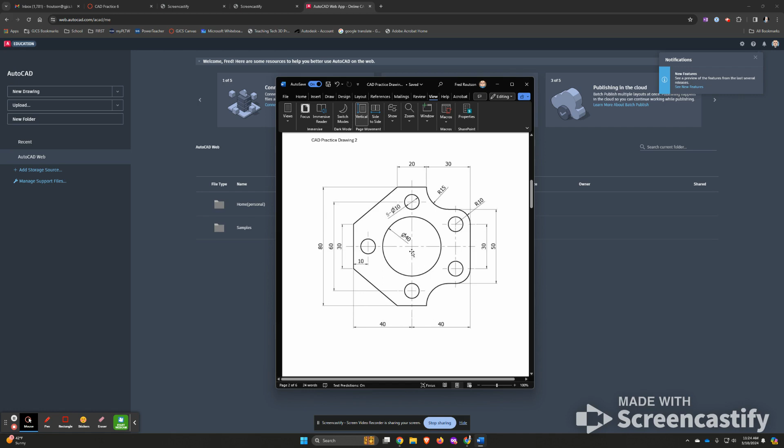So we flip back over to my AutoCAD window, and I'm going to do a new drawing. I've started to do something now that I recommend, to work in layers. I like to have a couple of different layers. By default you have this 0 layer, that's your base bottom layer. So I'm going to create a layer, and I'll call that construction.

And I'm going to change the color of the stuff there. It doesn't matter, just something different than white, so I might make that construction green. Then I'm going to hit layers, the plus sign, create a layer again, and I'm going to create what's called an object layer, and I'll leave that white.

And then I'm going to come over here to the top of this, underneath the ribbon, and choose my layer. I'm going to work in the object layer.

Another button that's really going to be helpful to you is this up here that's called Zoom Extents. I click that, and what I really want is to see this x equals 0 green line, this vertical line, which represents your x equals 0. And then down here, barely visible at the bottom, is a red line, which is your y equals 0. So I'll start this drawing, let's go back and look at it.

I'm going to start with the circle right in the middle at 40-40. So I'm going to come up here and click the circle button. I want to point out, down at the bottom of the screen it says circle, specify center point for circle, or 3-point, 2-point, or tangent radius. These are different ways to draw circles, but we're going to do a center point, so I'm just going to type in my XY coordinates: 40, 40, because that's the center of my thing.

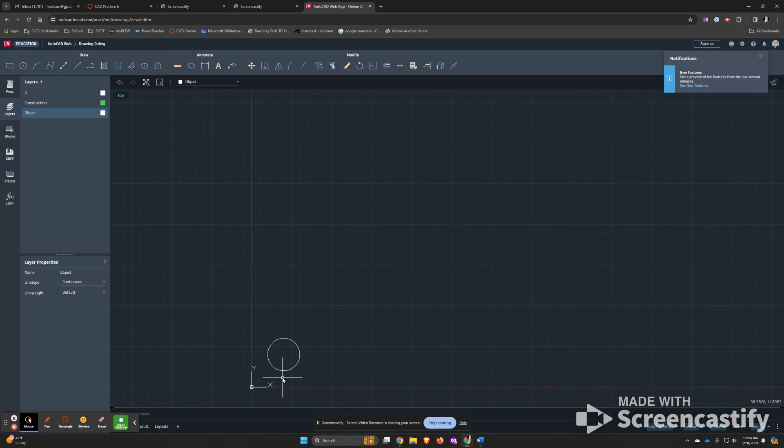Now it's asking me to specify the radius of the circle. I'm going to go back and look—that circle with a line through it means diameter, so the diameter of that circle is 40. Geometry tells us the radius is half of that, so it should be 20. Or I can click down here on this command line, click diameter, and now it says specify the diameter of the circle, and I can just type in 40. So when you get into really big numbers, odd numbers, or fractions, being able to put the diameter in exactly is very helpful.

So I've got my circle. Now I'm going to start going around the edge of this thing. I'm going to draw a line on the x equals 0. I'll start here, and that little line is 30 units long, which means—and this is broken right in half.

So I'm going to assume that midline is 40 units across, or 40 units up. So that's going to be 0,50 for this top point, and then 0,30 for the bottom point. So I will flip back over to my drawing.

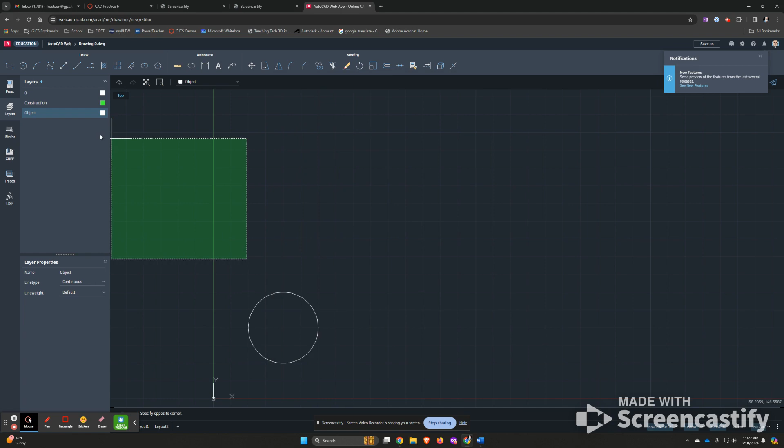I'm going to go to my line tool. There's your line tool. And here it says specify your first point. So x equals 0, y equals 50. I hit enter. It says now specify your second point. So I can go 0, 30, enter, and that's drawn.

Now I can just keep going around. So I need to go from that point down to this point over here, which is... I just made a mistake. I made a big mistake. Not a huge mistake, but I made a mistake. So I'm going to go back and fix that mistake.

So this is 30 units wide, which means it's 15 above and 15 below. So that should be 55, and that should be 25. So I'm going to hit undo. This is your undo button. And I'm going to go to draw.

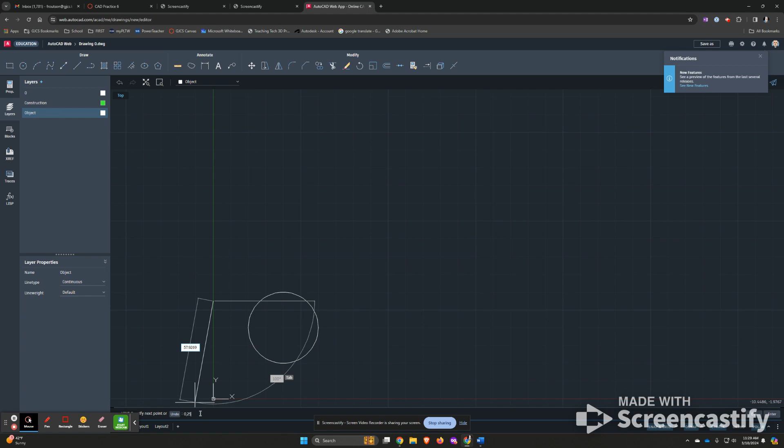This is the thing, I mean, we all make mistakes, and I make mistakes more than most. So my first point now is going to be 0, 55. And then second point is 0, 25, because it's 15 above 40 and 15 below 40.

Now, this is going to be, because this line down here is only 20, that's going to be 30, 0, and then 50, 0. So my next point is going to be 30, 0. And then the next point after that is going to be 50, 0.

Okay. Let's see, okay, that's looking kind of like the same.

Now this next one is a little bit more of a challenge. So I have to look at this drawing and I see that this little thing back here is 50 units wide, which means it's 25 below 40 and 25 above 40. So 40 minus 25 is 15. So this line right here is going to be 15 above.

And I'm going to go straight up because right now I'm going to draw this as a squared off corner, and then we will come and put the fillet in later. So that's the trick to this. That's the whole point of this assignment, is learning how to do these fillets.

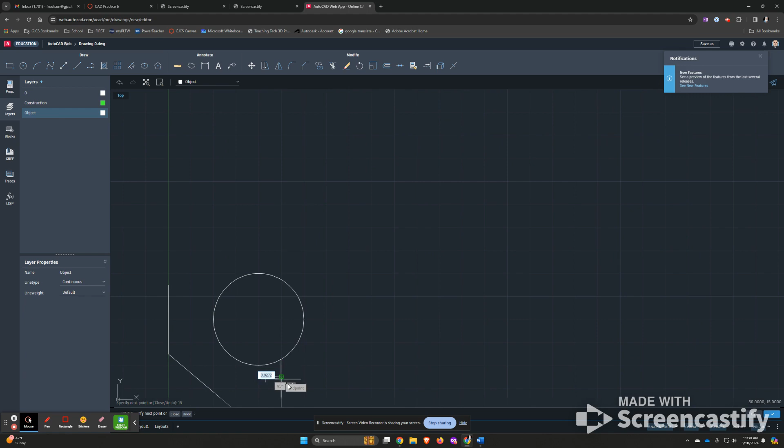So I'm going to go, and I could just do this. I could just move my cursor up here so that I'm drawing a straight line, and I could type in 15 into that and hit enter. And I can come over here and I'm going to draw this, and this has got to be, let's see, from that point over the edge is 30. It actually is labeled right up here. It's labeled 30, so that's going to be 30 long.

So I'm going to get my line so it's horizontal. I'm going to type in 30, enter. And then this one's going to go up, and remember this one goes up 50, enter. And I'm going to come...

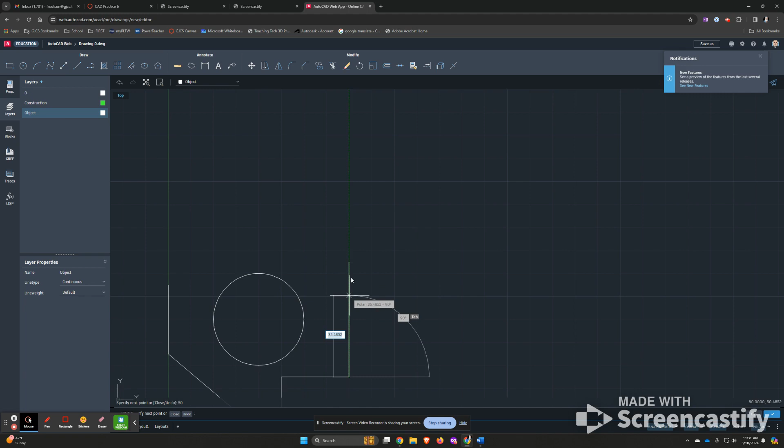50. Escape. All right, I'm going to undo. Okay, because I don't know what that was. So I hit undo down in this command line. I'm going to get this thing going back.

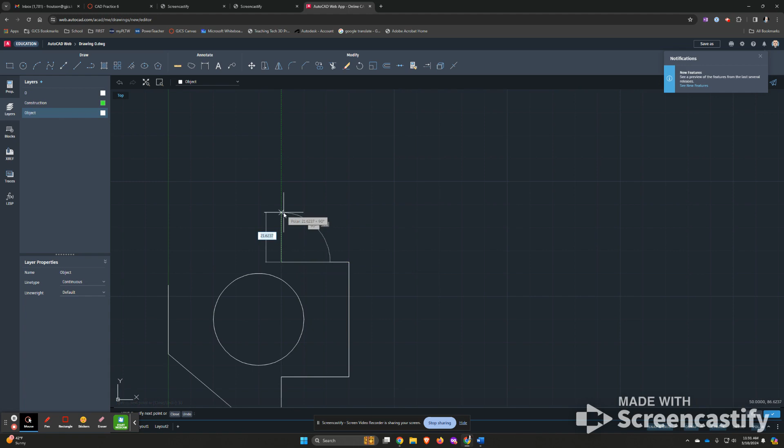I'm going to go back 30 again. So 30, enter. I'm going to go up 15. I'm going to go over 20. And then I'm going to just kind of go back to finishing that thing. And then I'm going to hit escape twice. No, we'll click there. And then I'm going to hit enter to get out of my line tool.

So that's roughly the outside. Now, this is the whole trick of the assignment.

It's coming up here to this modify part of the ribbon where it says fillet. I'm going to click on the fillet. I'm going to look down here in my command line. It says select first object or radius. I want to click on radius because I want to set my radius.

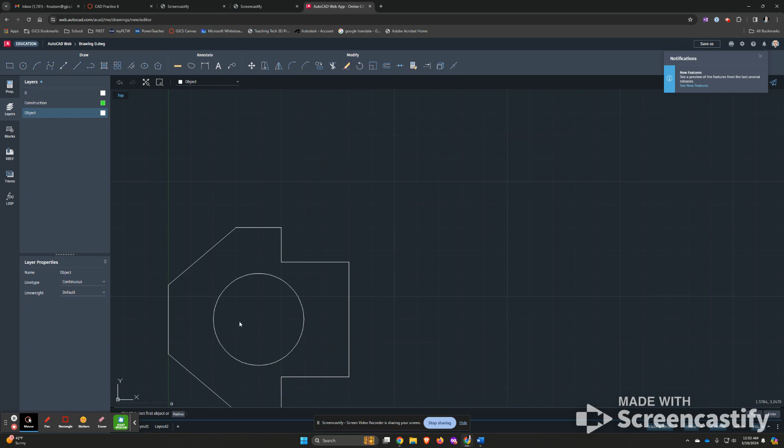And going back to here, I want to do these inside corners, which are R15. So I'm going to type in 15 down here, hit enter. So now it says my fillet radius is 15. Now I can select the first object and then the second object. And that puts that in there.

So now I'm going to do fillet again. And the cool thing about AutoCAD is that it will remember what you did. Excuse my dog barking in the background here.

So it remembers the last radius was 15, and it does that again. Now I'm going to do the fillets for these. I need to change the radius because these are now R10s.

I hit radius at the command line, type in 10, enter, and select these two lines. Then I'll do one last fillet. I go back to my fillet tool, or I can type F for fillet, which is a keyboard shortcut. Hit enter. The radius is still 10.

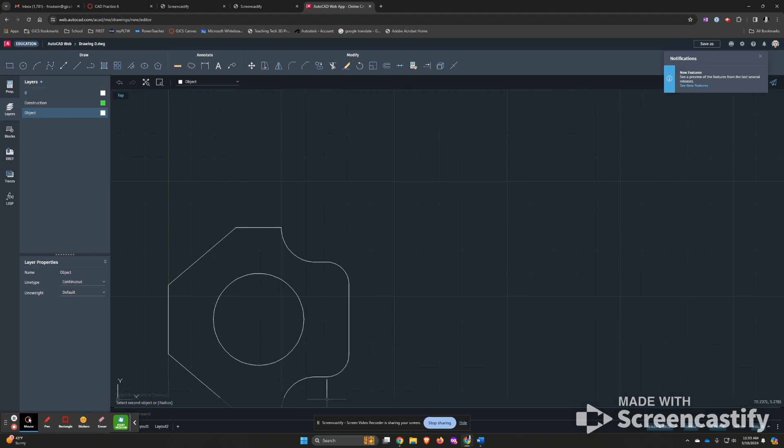And that is the shape you're doing. Now what's left to do is these 5 circles, and these circles all have a diameter of 10, radius of 5. There's 5 of them, and all you have to do is locate them.

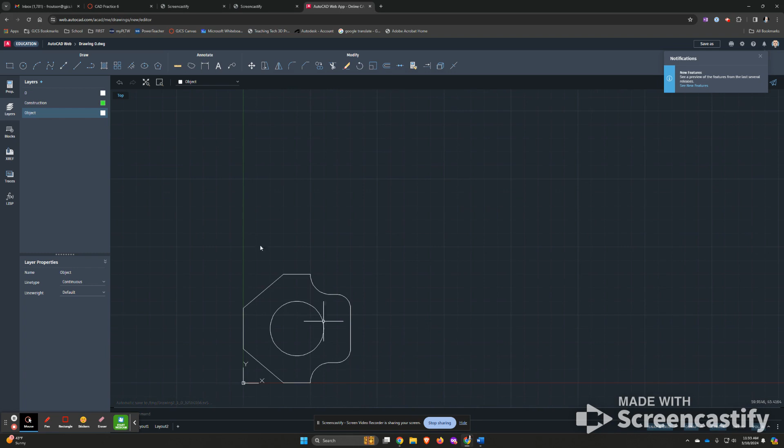This first one is going to be at x equals 40, the bottom one. Then I come down 30 from 40, so y equals 10, making it 40 comma 10. So we'll come down here. I'm going to zoom extents again and fill up my page.

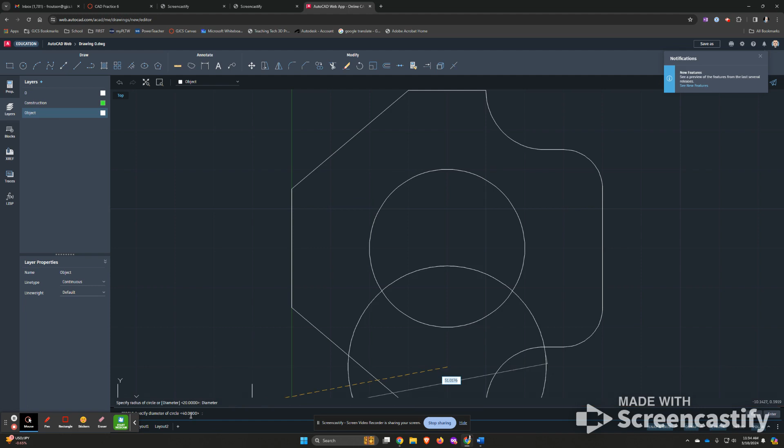I'm going to go to my circle tool, or type C for circle. It says specify your center point, so that's 40 comma 10. Enter. Specify the radius, or I'll click diameter and make that diameter 10. Enter. And that's the first one.

Now my next ones are going to be 30 between the two, which is 15 below 40 and 15 above 40, giving 25 and 55.

It tells me this is a radius of 10, so this is going to be 10 units. It's kind of weird - this is going to be 10 below or short of the full 80, so that's x equals 70. This bottom one will be x equals 70, comma 25. The second will be x equals 70, comma 55. So 70, 25 and 70, 55.

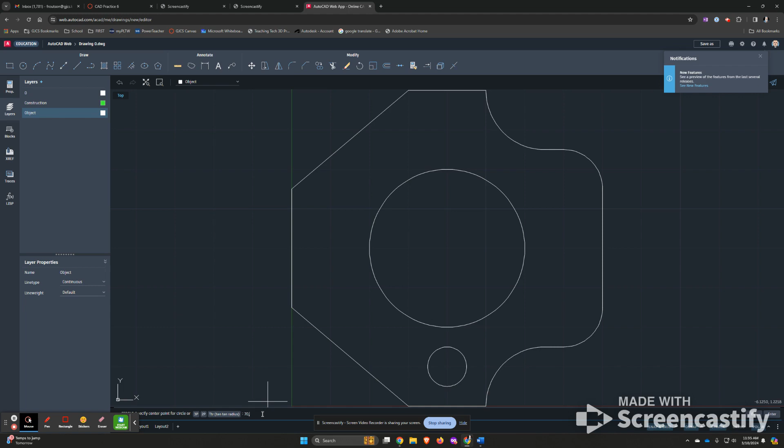So come back, type C for circle, type in your center point, 70, comma 25, enter, and it already has a radius of 5, so hit enter again. Then it's done, but now we can go really fast. C, enter, look down here, 70, comma 55, enter, enter.

Now we've got to do this one straight up above, which is going to be 40, comma 70. So C, enter, 40, comma 70, enter, enter.

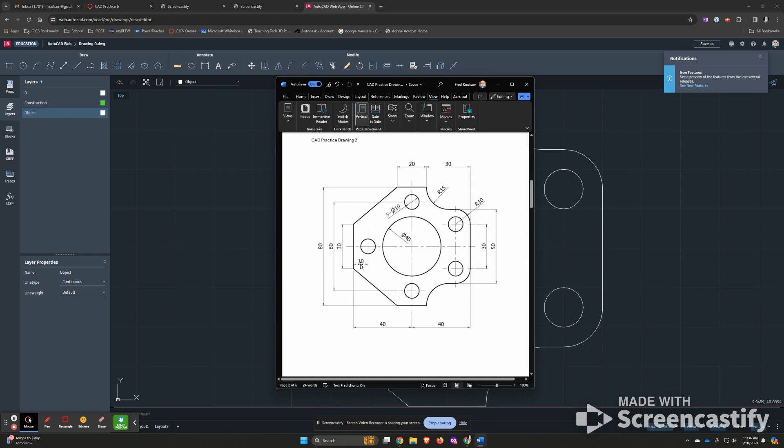This last one is going to be right over here, which is x equals 10, as it shows right here, and 40. So we'll type C, enter, x equals 10, comma 40, enter, enter. And that is our complete drawing.

To print, we click down here at the bottom where it says Layout 1. I'm going to click this print icon, plot to PDF. Again, I made another mistake - when it shows me this, the paper size is ISO A4, which is not correct, so I'm going to click cancel.

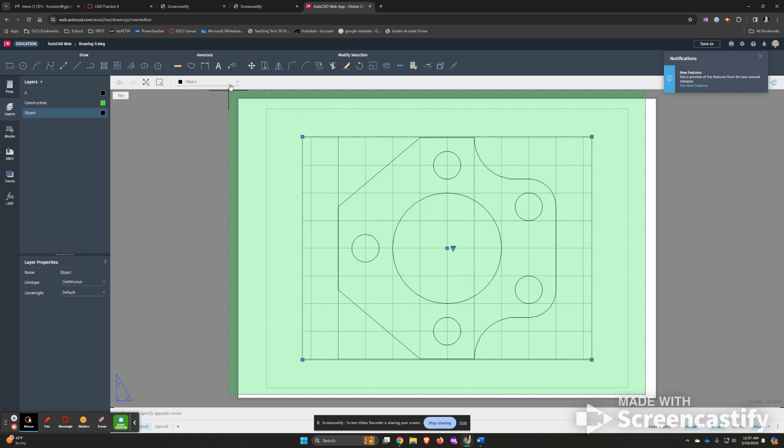I'm going to come over here to this layer properties. I'm going to try and choose - the object is continuous, I want the layout properties. So I want this, select this whole layer. It's not giving me what I want, so I'm going to click back to model, back to layout.

Just select. Layers - oh, properties. Properties up here in this object properties. So I'm clicking this properties up here, changing my paper size to letter, 8.5 by 11. Now that's the proper size for us to print in the classroom.

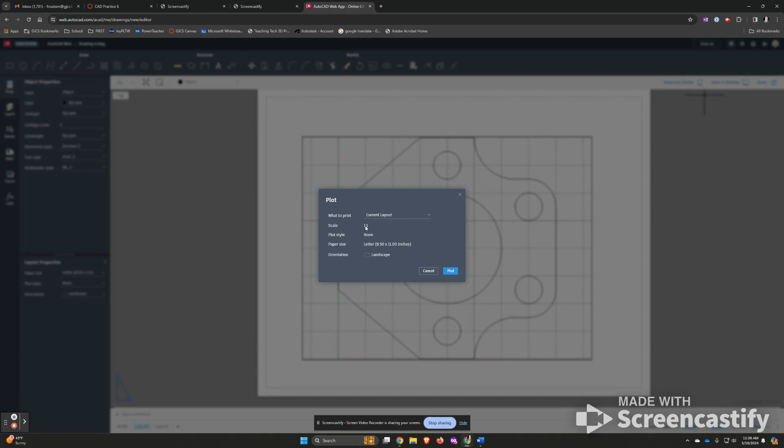Now I can click this plot button, and it says what to print: current layout, scale is 1:1, plot style is none, paper size is letter, which is what we want. We click plot and it prepares it, and when it's done, it says PDF is generating.

Now it's done, I can download the PDF, and this PDF is what you would turn in. You could print this on our printer in the classroom and turn it in.